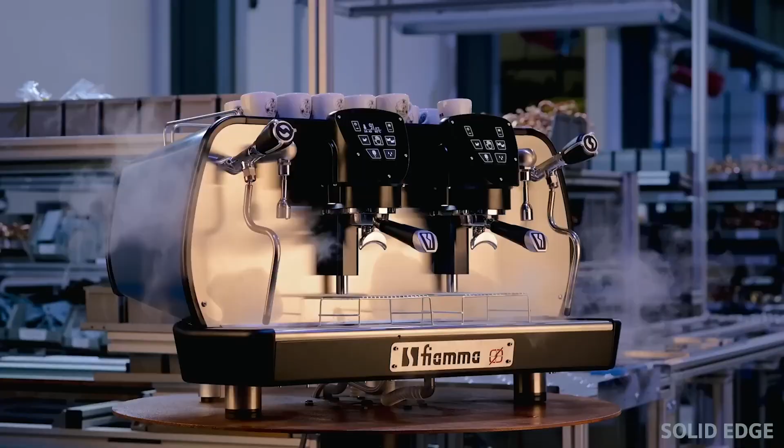Welcome to Solid Edge 2024. I'm Dan Staples, Vice President of Solid Edge R&D at Siemens. I'm joined today by Sudha Srikakalapu and John Sutcliffe. Sudha and John are both product managers for Solid Edge.

We're excited to discuss how you can unleash the power of intelligent product design, and that's at the core of digital transformation. So what is digital transformation? It's the integration of digital technologies into all aspects of your engineering business. But what that looks like can vary by the size of the company. So what does digital transformation specifically mean for small and mid-sized businesses?

We sponsored an exclusive study with industry analyst IDC. The focus was SMB manufacturing and digital transformation. We surveyed key decision makers at hundreds of SMBs around the world, asking them about digital transformation, their strategies, plans, and recent progress. The study was conducted at the end of 2021 and previously in 2017, so we can also look at the trends over the past few years. I want to share just a couple of highlights.

First, 72% of the advanced SMBs surveyed believe that digital transformation helps level the playing field for small businesses versus their larger competitors. Even higher than the last time this survey was taken, it was 63%. We asked about their investments during the global pandemic and related disruptions, and 80% of SMBs maintained or increased their digital transformation budgets. That's a great measure of how important these investments are.

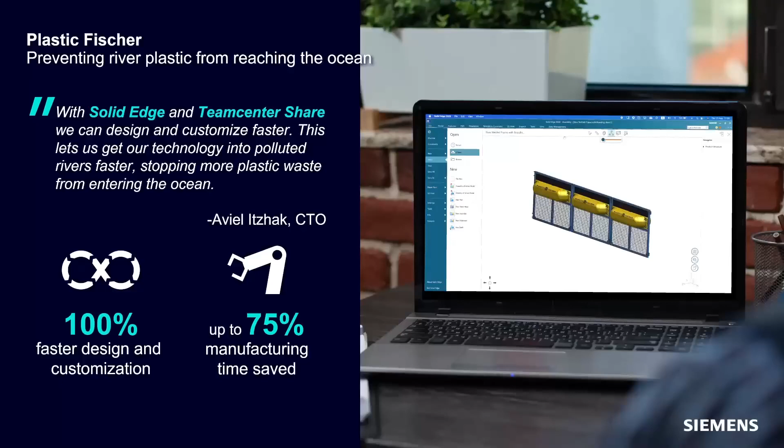Plastic Fischer is an amazing startup. They're helping the planet be a better place by keeping the oceans clean. Using Solid Edge and collaborating via Teamcenter Share, they improved design time by 100% and saved 75% in manufacturing time. Those are some big numbers and what digital transformation can bring. We love helping startups and really businesses of all sizes with digital transformation. Siemens is committed to that mission.

We are also investing in the next generation of engineers through a new program called Hour of Engineering. This innovative program demystifies engineering and promotes it as a desirable career path by providing real-world engineering challenges connected to global goals. It helps students build engineering habits of mind like creativity, systems thinking, and collaboration. We're truly excited to engage with the engineers of tomorrow through this amazing program.

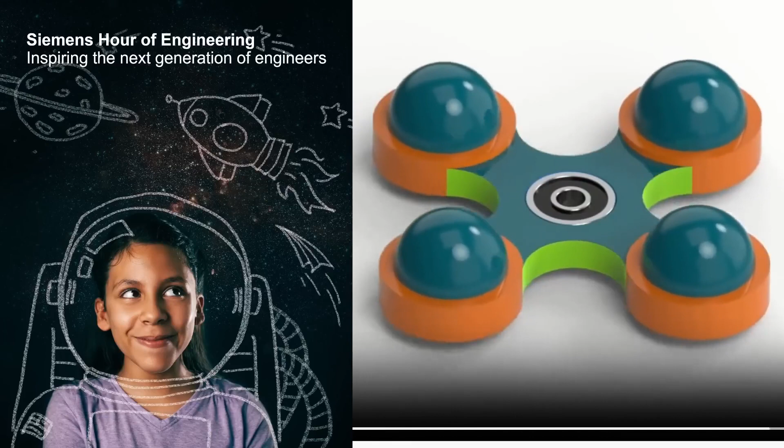From education to startups to even larger enterprises, Siemens Digital Industries is all about helping companies like yours transform into a digital enterprise. And that digital transformation is enabled by Siemens Accelerator. Siemens Accelerator is an integrated portfolio of software and services, and it really blurs the boundaries between traditional standalone domains like electronics, mechanical, and software. It really ties all those together into one seamless whole. And Siemens Accelerator really starts with Solid Edge.

Solid Edge is a key part of the Siemens Accelerator portfolio and is focused on the requirements of small and mid-sized manufacturers. Solid Edge enables manufacturers to create a comprehensive digital twin of their products and includes solutions for mechanical design, electrical design, simulation, manufacturing, and publications. It also includes solutions for data management for all the technical data that's created and consumed when supporting the comprehensive digital twin. It facilitates collaboration both within manufacturing companies and with external resources, including suppliers and customers. Solid Edge is truly your on-ramp to digital transformation.

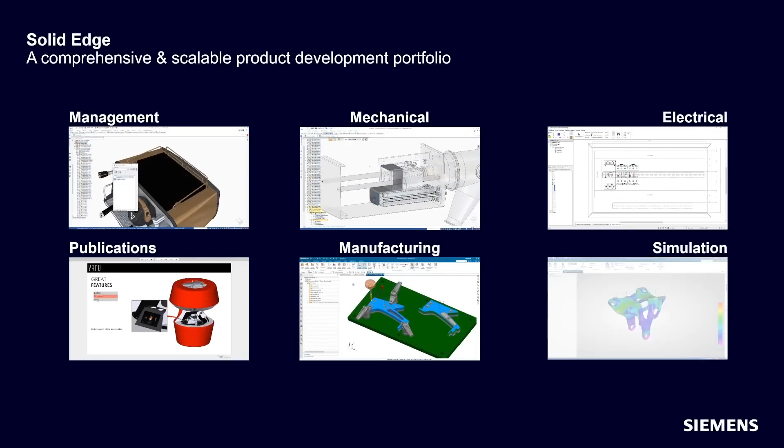And we can help you accelerate that digital transformation with Solid Edge 2024. Unleash the power of intelligent product design. With this year's release of Solid Edge 2024, we continue to push the boundaries of product development. Solid Edge 2024 empowers users to design more intelligently across every aspect of product development. With a continued focus on the user experience and large assembly performance, Solid Edge 2024 introduces functionalities and enhancements to automate and speed design as well as collaboration. Here are just a few.

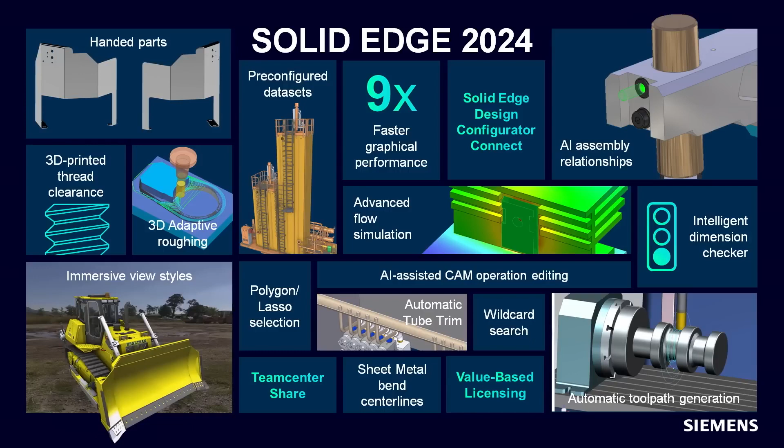9 times faster graphical performance, AI assembly relationships, great advancements in intelligent dimensioning, and so much more. Solid Edge 2024 is our best release yet. Beta customers have already had the opportunity to experience Solid Edge 2024, and here's what one of them had to say. Each year, Solid Edge gets better and better. Everything is faster. You can definitely feel the excitement from folks like Karsten at FOCA, who've had the chance to work with Solid Edge 2024.

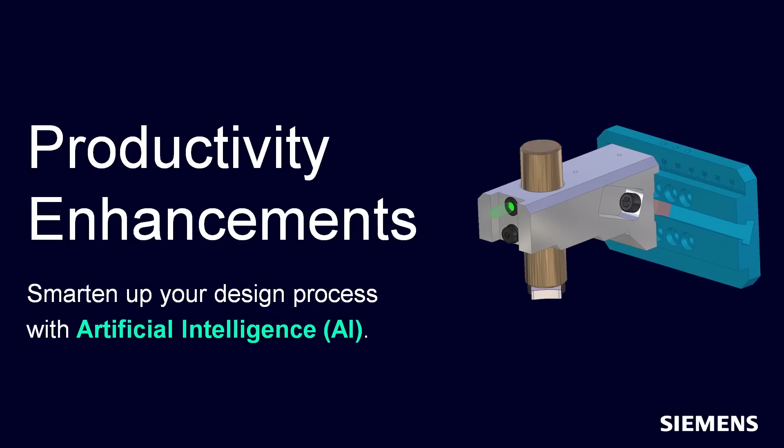Our featured customer in this year's release is Supfina from Germany. Supfina produces high-precision, fully automated grinding and honing machinery designed for super finishing automotive engine components such as crankshafts and camshafts. Let's start with a look at some overall productivity enhancements. These are the things that will definitely make your daily life easier. And we're leveraging AI technologies in the design process to push that even further. Let's take a look with John.

John? Thanks, Dan. Let's dive right into this impressive Supfina machine. We'll start by focusing on the polishing tool and fixture for these high-performance motorsport roller bearings. By expanding the assembly features in the Pathfinder, we can see that a hole and cutouts were already added at the assembly level, and they need to be completed with a round and a chamfer.

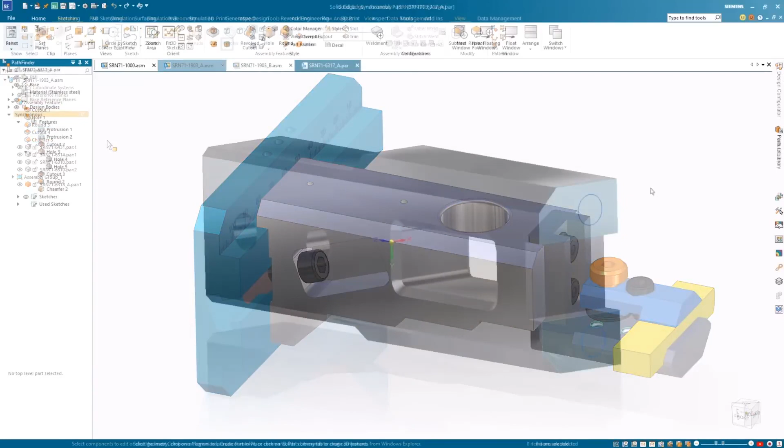New for Solid Edge 2024 is the ability to reorder the assembly features with a simple drag and drop process, just like we can in an ordered part model. It allows you to move parent and child features together, keeping your model organized. The polishing tool has a 3D printed component that requires 2 holes to be added.

To ensure appropriate fit and assembly for the 3D printed threads, we can define additional clearance values. These can be input as either a percentage or an absolute value. By selecting percentage, the internal diameter will increase by a percentage of the nominal diameter, which is seen in relation to the sketch. Switching to absolute allows the entry of a specific measurement.

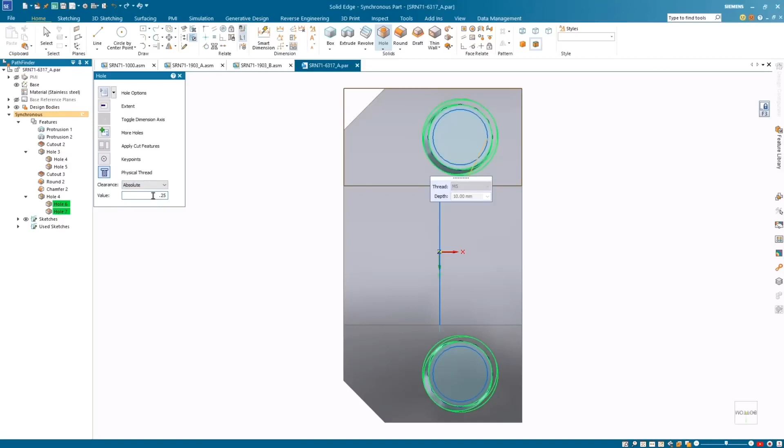To finish off the assembly, we'll add a polishing tool to the bottom of the cylinder. Here we'll add a mate and then a planar align. But then when trying to add the final axial align to correctly position it, we see it conflicts with some of the other relationships. Using the new Resolve Relationship Conflict capability, we can easily identify and suppress conflicting relations to resolve them swiftly. This new tool helps streamline part placement and assembly relationship creation.

Hovering over the listed conflicting relationships in the dialog highlights them graphically. One or more relationships can be suppressed until the requested relationship turns green, and the part is then placed correctly.

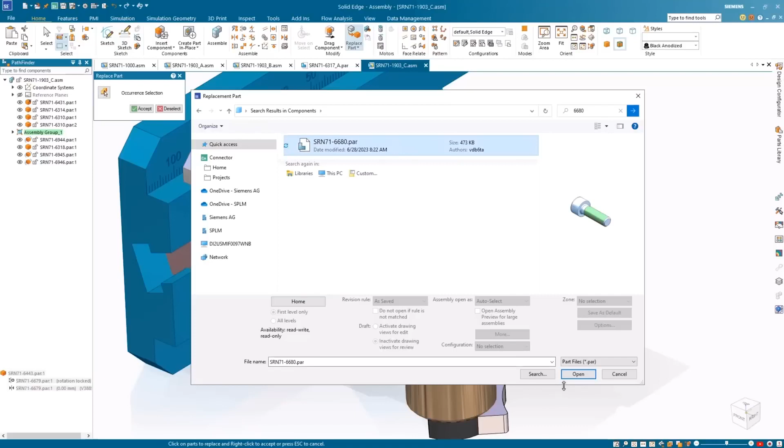The improved Replace Part command now leverages artificial intelligence to predict solutions for replacing a single component occurrence within an assembly. The AI predictions support both planar and axial align relationships and present the solutions in a secondary dialog, allowing us to preview and select the most suitable option before executing the replacement, saving time and effort by not having to manually create relationships.

Enhancements to variable table filters provide quick and easy access to filter options, resulting in an efficient experience that reduces both time and mouse clicks. In this example, variables are being used to control the position of the polishing tools and ensure they'll contact the bearing at the correct locations.

With numerous variables in the assembly, the results can be filtered by user-created, system-created, or both. Another great option for filtering is to only view variables relative to the components that are selected. This makes it easy in this case to find the swivel angle variable and make the desired change. And then change the NC axis value to change the vertical height of the polishing tool. Dan, back to you.

Super. Thanks, John. One of the things that you saw was physical thread clearance on 3D printed parts. And it turns out this is really important because unlike manufactured parts, where the standards define the clearance and high tolerances keep things working smoothly, in 3D printed parts you can get clashes that prevent smooth operation. Solid Edge automatically eliminates these, ensuring your printed parts work effectively.

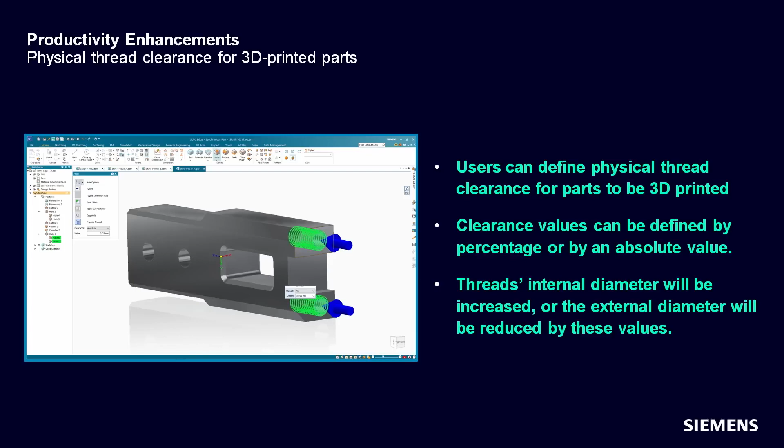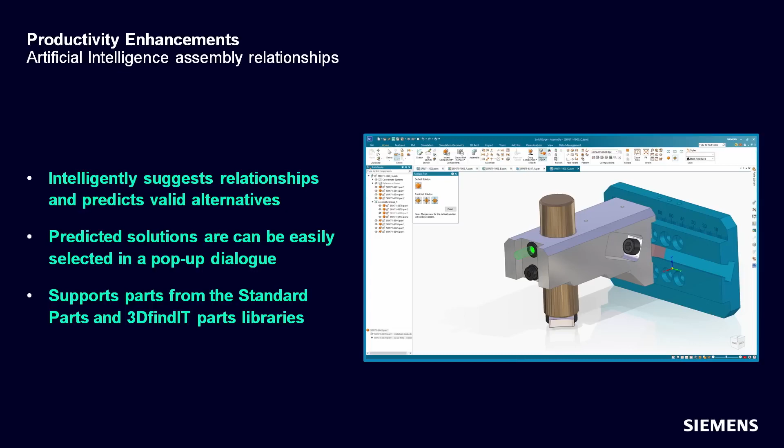You also saw the power of AI in action. With the improved Replace Part command, Solid Edge can now intelligently suggest assembly relationships and predict valid alternative solutions. The predicted solutions are graphically previewed in the design environment and can easily be selected in a pop-up dialog. And in addition to working with your custom designs, the AI-enhanced Replace Part functionality also works with parts from the standard parts catalog and 3DfindIT. Really powerful. Here's what Dave Iverson of Ariel had to say about Solid Edge 2024.

And I love the fact that he said, do more of the fun stuff. The reality is we are often doing tedious tasks. Let the computer do that. And that's what AI in Solid Edge 2024 can deliver.

Let's take a look at some more productivity enhancements in Solid Edge 2024. Over to you, John. Thanks, Dan. Let's look at even more productivity enhancements.

Locating the right part has never been easier. Search wildcards are now supported in parts libraries, model view palettes, and the assembly pathfinder. These wildcards provide flexibility when searching and make it far easier to find what you're looking for, even if you only know part of the name. Search results display sub-assemblies and parts in various shades of green for easy identification.

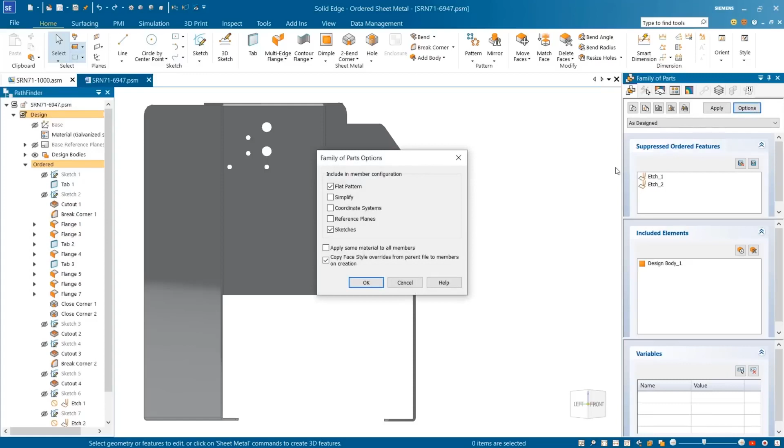With expanded family of parts options, we can now include flat patterns for sheet metal family of part members. This ensures each member contains all the information needed to create drawings and annotations. Once we define the new members, we can see further enhancements to family of parts, which include the ability to set individual material properties per member, as well as control over the suppression state of sketches and etch features. Not seen here, but we can also now handle simplified parts, coordinate systems, and reference planes too. Selecting a specific member shows the material change alongside the etch features defined for each specific member.

Greater control of selecting objects has been added with new polygon and lasso selection options. This makes many common workflows much easier, like in this case with resizing holes. Using the lasso selection option, we'll select the desired holes and change the size with ease. These selection options are available right through the product in the part, sheet metal, assembly and draft environments.

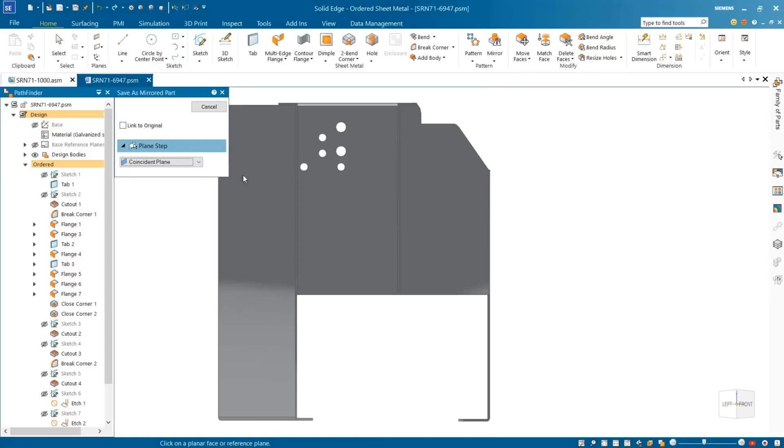Many designs require handed parts. These symmetrically opposite parts are identical mirrored copies of one another. New streamlined workflow makes it easier and faster to create these left or right-handed parts that can remain associative to the original part if needed. With the selection of the mirror plane and a quick save, our new handed part is immediately available for use. And the best part of using the Save as Mirrored command is that all the features used for creating the original sheet metal part are carried over, minimizing errors when making downstream design changes.

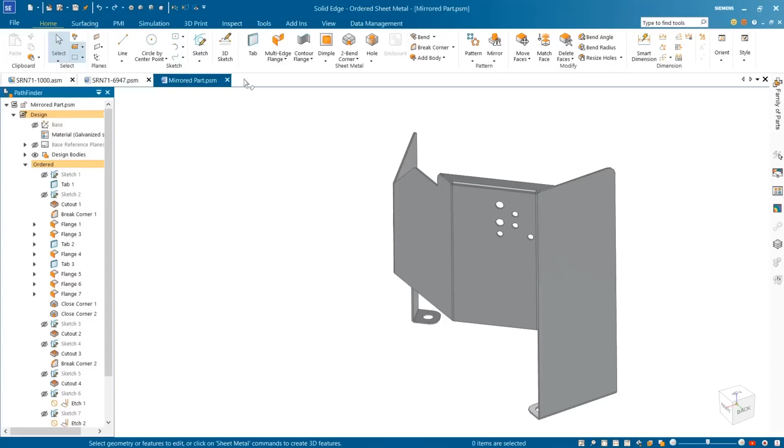The display of bend center lines is also now available in the flat pattern model environment. Here color coding defines the bend direction. Up bends are displayed in blue and down bends in green. The color and style of these can easily be modified to suit your company standards.

In Solid Edge Express Route, multiple pipes and tubes can now be automatically trimmed with the help of the new Trim Tubes command. In this example, after turning on the clipping planes, we can see there's overlap between the main tube and the 3 cleaning tubes. We can trim these tubes so they join together seamlessly with just a few simple clicks. Simply select the primary and secondary tubes, then Solid Edge takes care of the rest, cutting holes and trimming the ends as needed.

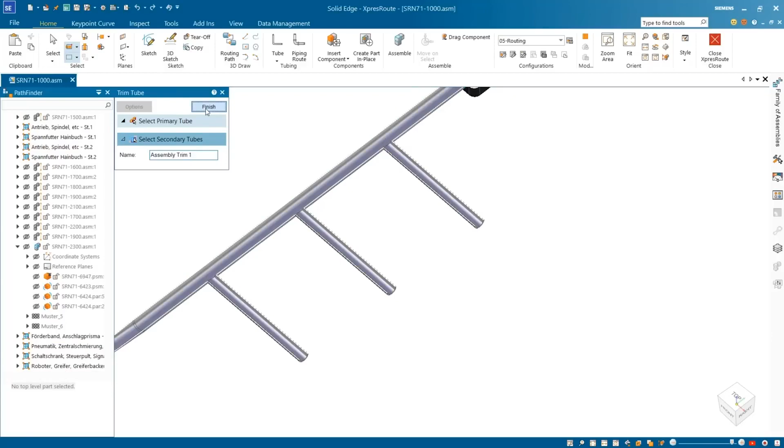Another new capability is the new Compact Recent Documents toolbar. It no longer takes up graphic space, and a single fluid click and drag quickly opens the file we need, saving time and energy.

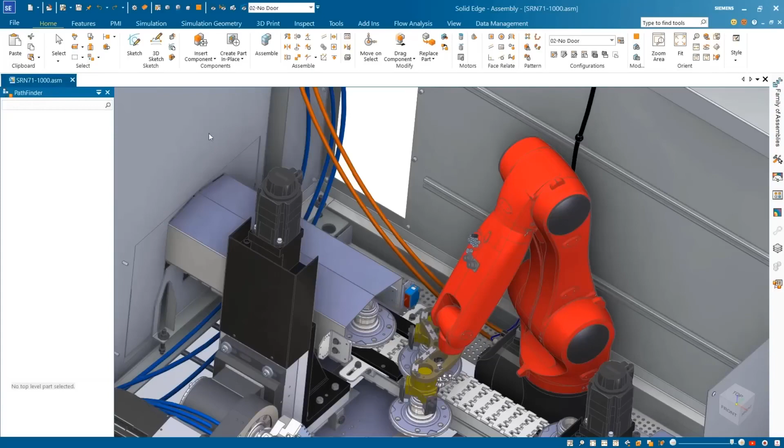The sheet metal cover requires some modification with the addition of several punched slots, which will locate it in the overall design. Construction bodies have been placed in the sheet metal part to represent the punches used to remove the material. Using the Subtract command, we can select the main target body and then quickly and easily choose the solid bodies as the tool set. Unwanted regions left behind as a result of this subtract operation, or disjoint regions, can be intelligently identified and automatically removed. Hiding the construction bodies, we can see all the internal disjoint regions within the sheet metal part have been removed, making the whole process quick and easy.

And back to you, Dan. Thanks, John. Now, obviously Solid Edge has had the ability to create left and right-handed parts for many years. But did you catch the breakthrough here? Optionally, instead of just producing a body, it will create a mirrored part with a fully editable feature tree. This frankly was quite a tough problem, and we had quite a few requests for it. So we're super happy to bring this to you in Solid Edge 2024.

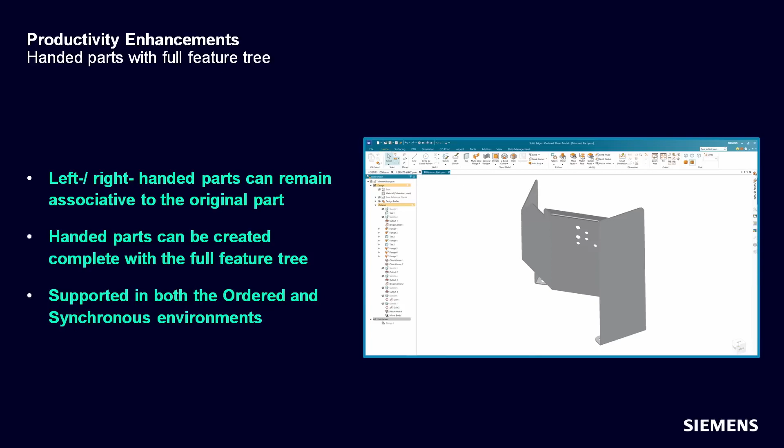You also saw a ton of other great enhancements, and just to highlight a few: Family of Parts not only creates correctly sized bodies based on the parameters, but it also supports material, etches, coordinate systems, sketches, and more. This was a long-standing request that we're very excited to deliver.

Lasso selection can be handy in so many circumstances, and now it's super easy.

An often requested enhancement, the new Trim Tubes command automatically trims and cuts holes in intersecting tubes in the assembly environment. It not only supports tubes that butt into each other, but end-connected tubes can also be automatically mitered.

The variable table has been really improved, allowing users to access filters more quickly and easily, saving time and reducing mouse clicks.

When placing parts, conflicting relationships can now be automatically identified, giving the user the ability to resolve conflicts easily with a pop-up dialog that displays the issues.

And so much more: matching coordinate systems, reordering assembly features, removing disjoint regions. The list just goes on and on.

Daniel Schulz of KAESER had this to say: Siemens really listens to its customers. And it's true, we do. We really work closely with our customers and listen to how we can make things better, and this has really helped make Solid Edge the great product it is today.

Next up is large assembly performance. Solid Edge truly has best-in-class large assemblies, and now it's even better. Better model view performance allows you to view and manipulate even the largest assemblies without lags, stutters, or buffering.

New immersive view styles put your models in a real-world environment that automatically updates with model movement for more realism. View manipulation is automatically optimized, allowing users to run the most demanding assemblies at lightning speeds, without loss of detail or the need to adjust settings to hide features, parts, or assemblies.

Dynamic viewing is up to 3x faster on single parts and up to 9x faster for very large assemblies.

Companies like Hatch are building some of the largest assemblies in the world. And as John notes, the Solid Edge 2024 advancements can have a huge impact on their designers, as much as 30% productivity impact.

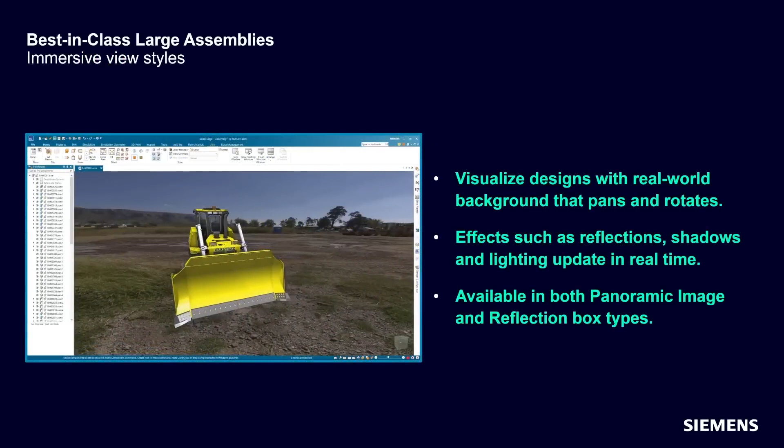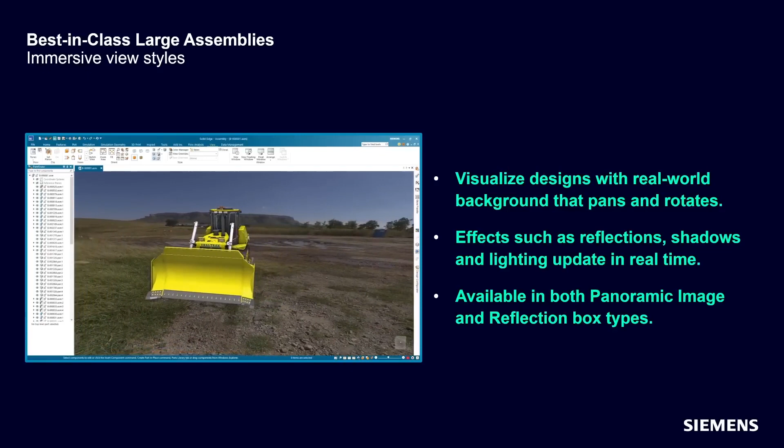In addition to the amazing speed improvements, you can also now visualize designs in a real-world background that pans and rotates with your model to create a more immersive user experience. As a design is manipulated, graphic effects like reflection, shadows, and lighting are also updated. This creates a more realistic, lifelike representation of the model in its environment. It's just like you're walking around the model in the real world.

Next up is Design Configurator, and I want you to pay special attention here because I know so many companies can benefit from this technology. Not only can you configure your own designs instantly, we are now delivering pre-configured conveyors, ladders, and other equipment that's commonly used in large machines and plants. What a time saver. Let's take a look.

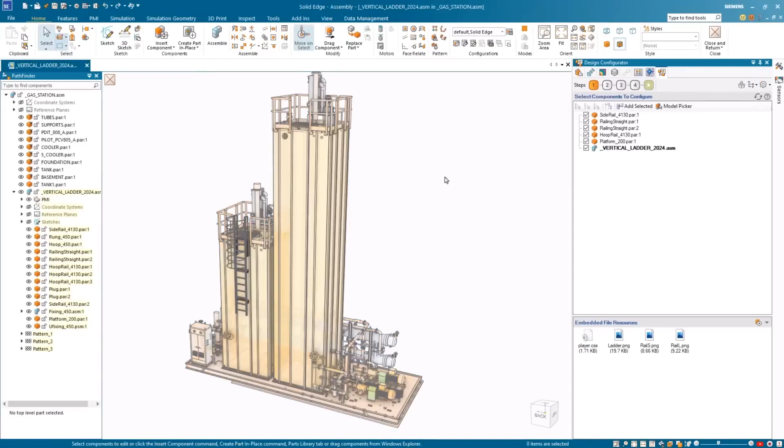Manufacturers are facing increasing pressure by their customers to offer greater choice and variety, leading to an increase in the number of product variants they need to define, author, and manage. New pre-configured models in Solid Edge Design Configurator allow quick and easy placement of intelligent datasets like ladders, conveyors, and enclosures. This helps to dramatically simplify workflows and improve productivity.

In this example, a fully configured ladder assembly is being modified directly within the main assembly environment. There is no need to go back to the sub-assemblies and configure them individually. A secondary ladder is needed to complete our design.

After placing the ladder, we can customize the length. Due to the intelligent model's rules, a second section and a safety hoop in the middle are also added.

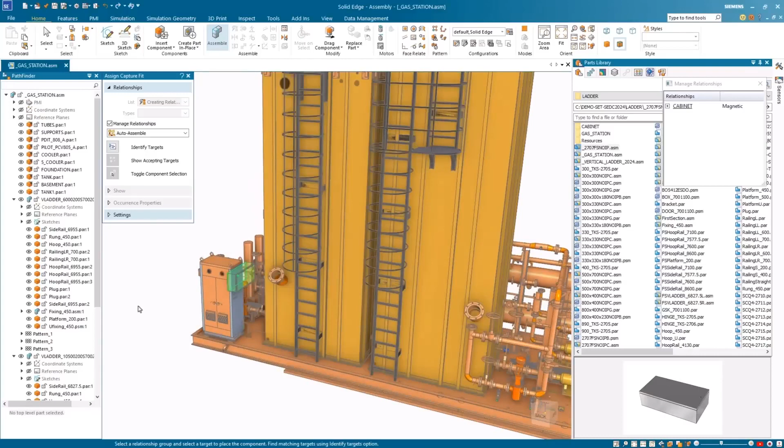To finish up the assembly, we need to add a final cabinet. The cabinet can be quickly customized inside the main assembly with the necessary dimensions and colors to fit our needs.

With access to fully configured datasets such as ladders and cabinets, it has never been easier for customers to get jump-started with our Solid Edge Design Configurator.

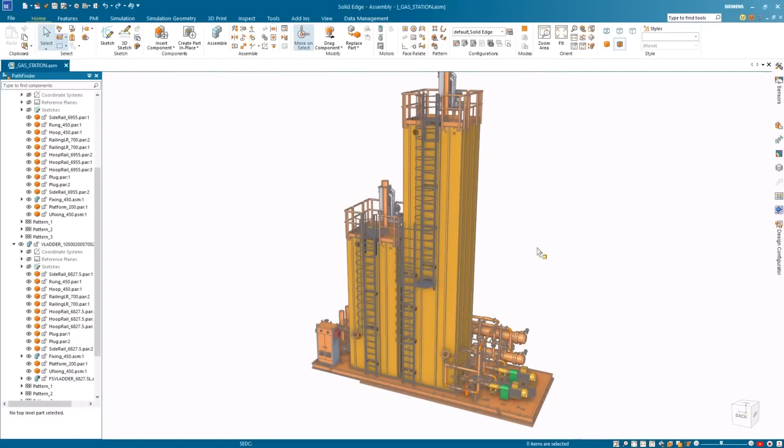With the new Call Subassembly command alongside the Place Part Model and Loop Action commands, full subassemblies can be placed and configured right on the spot. Using these new workflow model actions, brand new assembly lines can be rapidly built.

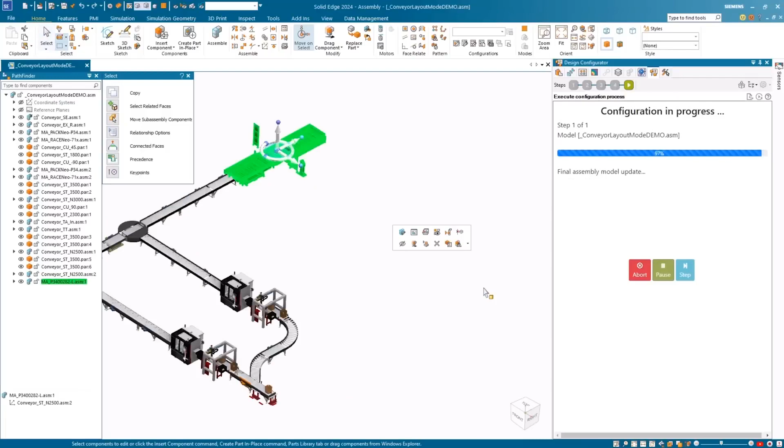The new ability to read from Excel files and external databases for input data and model actions allows you to automatically complete assembly lines in a fraction of the time. By reading the necessary conveyor placement data from an Excel file, the software instantly configures and completes the assembly line with just one click, as can be seen here.

Okay, back to you, Dan. Thanks, Sudha.

Isn't that amazing how quickly those ladders were put in place and fully configured in seconds? You can really boost design speed using pre-configured models of ladders, conveyors, and enclosures. One of the most requested customer features, pre-configured models downloaded from the Siemens Support Center, can now be directly used in the assembly at no cost to Solid Edge Design Configurator users.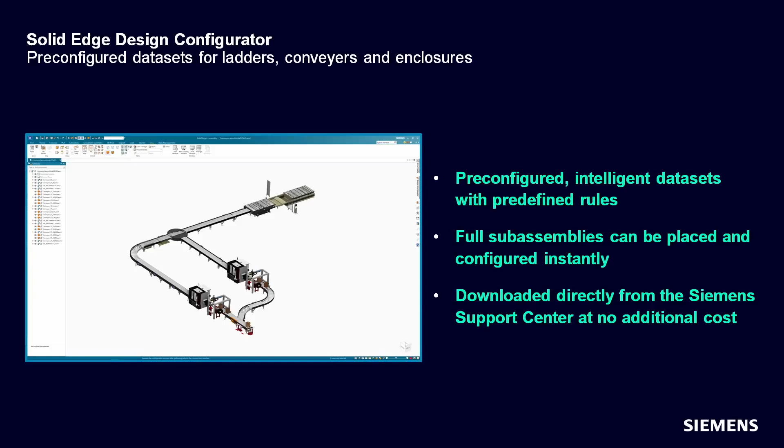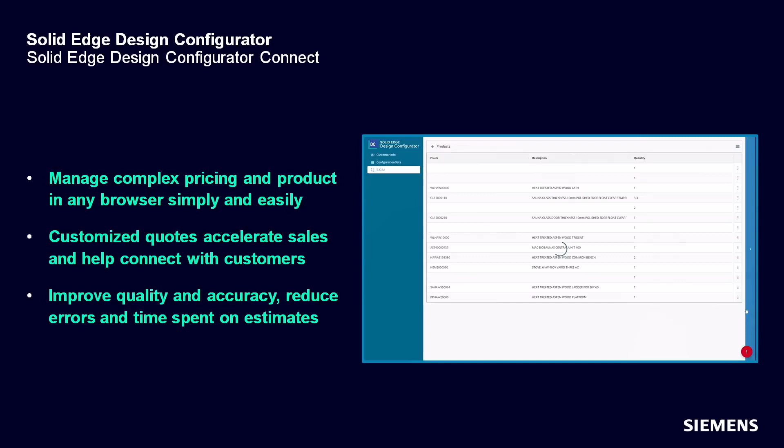In addition to all the great Solid Edge functionality you saw for configuring designs, you can also take advantage of Solid Edge Design Configurator Connect. This is a user-friendly web-based configurator that manages the most complex pricing and product configurations, allowing users to configure online in any browser simply and easily, and automatically generate sales documentation, including 3D models. Connect your engineering processes with sales and marketing, streamlining design workflows with the new Solid Edge Design Configurator Connect.

Michael Orr at Ariel quickly saw the value of Design Configurator and how it leverages your data and knowledge to really streamline assembly customization. He notes that it could be a real big time saver. If, like Michael, you thought that Design Configurator can save me time and money, I'm not surprised. It's an absolute productivity booster.

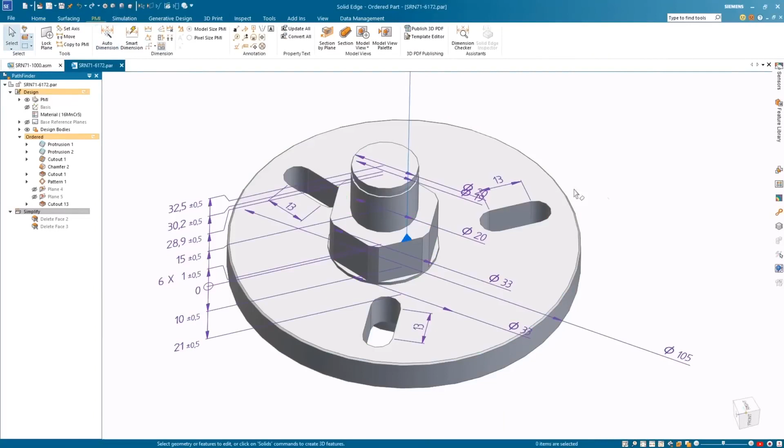The improved auto dimension tool in Solid Edge Advanced PMI can now be used with 1 or 2 datums for more freedom when automatically dimensioning turn parts. Using the new recent documents preview, we will open another bracket that's been partially dimensioned.

With the dimension checker command, we'll quickly and easily identify the constraint status of features and parts. The model is automatically color-coded with feature IDs, informing you of the constraint status of features and if they lack tolerance information. In this example, the slot and holes are under constraint and a dimension is missing a tolerance value.

By adding the necessary tolerance, Dimension Checker will instantly update with the new status, and the Auto Dimension tool will automatically add the missing location dimensions for the holes, improving creation speed. The improved Auto Dimension tool also includes stack dimensions and callouts for slot and oval cutouts. Features chosen in the selected primary, secondary and tertiary planes can be auto-dimensioned instantly.

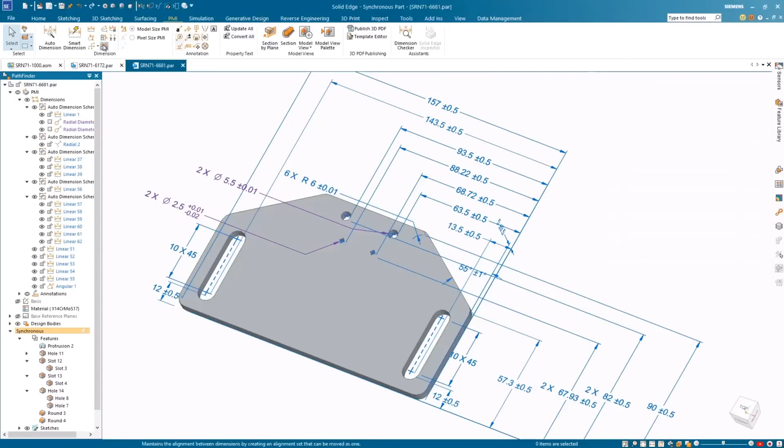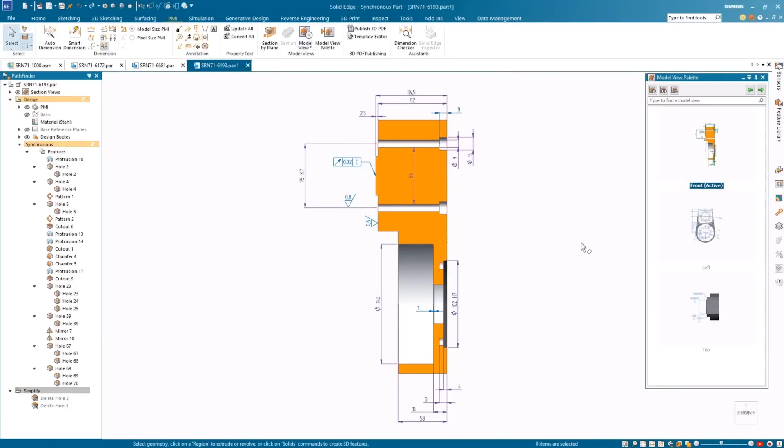The Common Model View command allows users to create common model views automatically with existing PMI. With the required views selected, Solid Edge automates view creation. Applying section views to a model view is easy with the enhanced vertical command bar that can be launched from the model view palette. This simplifies editing model views, as we can see here, whilst also adjusting the render mode.

To clean up the PMI dimensions, we will run the enhanced Arrange Dimensions command, which provides the ability to arrange coordinate dimensions alongside the linear dimensions. The Update Model Views automatically updates all model views when the model changes or PMI is added or removed. Auxiliary plane indicators can be added, giving us more freedom to annotate the models based on ISO or DIN standards.

We can also convey design intent for downstream manufacturing processes with 3D PDFs that can be published using templates. You can export PMI views with selected section views and render styles to 3D PDF to streamline the delivery of relevant design information. With new PMI face association, parent faces and section views are automatically highlighted when they are selected in the 3D PDF.

For assemblies, 3D PDFs can contain an interactive parts list. On selection, parts are highlighted in the list and graphics window. Associative properties such as author can also be included. STEP AP242 and JT files can also be generated and added as attachments within the 3D PDF.

Interoperability enhancements allow your Solid Edge files to look the same when opened across the Siemens Xcelerator portfolio, including NX. The improved PMI association and support for various PMI data provide increased connectivity for downstream applications.

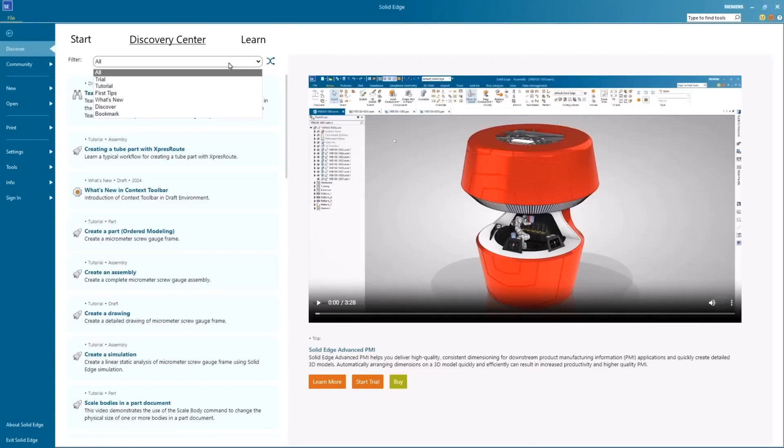Back to you, Dan. Wow, some really great stuff here, and I suggest that all companies look at this. We recognize that drawings aren't going away anytime soon, but it makes sense to move the intelligence upstream. Why have some of the information in the part and some in the drawing. Let's get to a single source of truth, the model. With 2024, there's some great enhancements here to get you on this path.

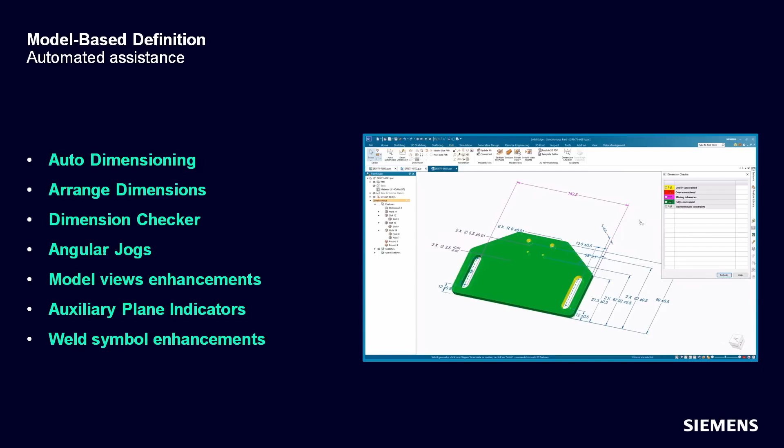Auto dimensioning has had a serious upgrade, and the dimension checker really lets you understand if your dimension scheme is complete. And there are many other enhancements, so now's the time to get started with model-based definition. But don't worry, you can move at your own pace, either doing drawings or creating smart PDFs. It's really up to you.

I'm always amazed at how some seemingly small improvements can make such a big difference. Ken at Pello was really taken with the new, better layout that the automatic dimensioning provides, a huge help to his team. As I mentioned before, don't worry, drawings aren't going away, and Solid Edge will continue to be the best in the business.

But if you're further along in the journey and looking to publish 3D PDFs, then we have you covered. For example, 3D section views are now supported during Publish, and you can now graphically highlight items in the PDF and see what's associated. This is really helpful in downstream interpretation. Companies like Kaiser are already on the paperless journey and are seeing definite benefits. Daniel sees some real savings coming as they transition to MBD and smart publishing techniques.

We've been talking a lot about core CAD functionality, and that is truly important. But more than ever, collaboration is key to improving engineering productivity. I don't think any of us could have anticipated how distributed our teams would become in recent years. But we definitely have some amazing tools to support this, and this comes in the form of Solid Edge SaaS, where collaboration is built right into your daily work. Let's take a look with John.

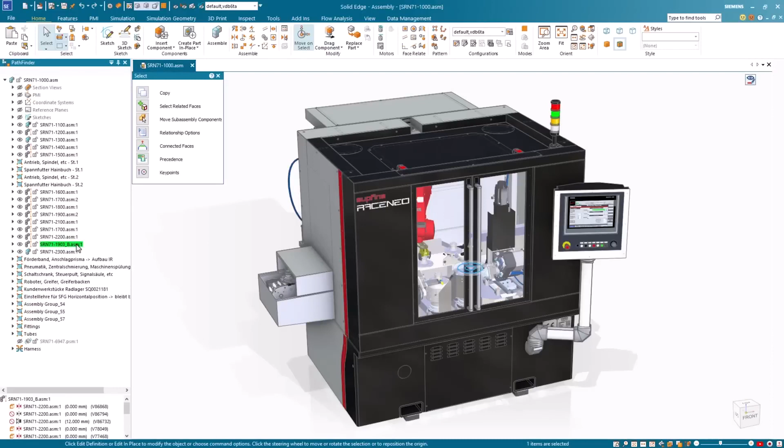Thanks, Dan. Fully embedded in Solid Edge 2024, Teamcenter Share streamlines collaboration with all your team, partners, and customers. Users can now access Share's comprehensive suite of collaboration capabilities completely within the Solid Edge environment. Opening our Supfina super finishing machine from Teamcenter Share in Solid Edge, we get to work quickly as we look at adding threaded holes to this part we plan to 3D print. Here you'll notice the options to add additional clearance to the threads that we discussed in an earlier demo.

Using the built-in data management capabilities, we can check in files to allow other users to make modifications, or check out an assembly to ensure exclusive access while we make changes. Again, with Teamcenter Share fully embedded in Solid Edge, we never have to leave the design environment as we create a project with just a few clicks. With Pack and Go and the Siemens connector, we can share the subassembly directly to Teamcenter Share.

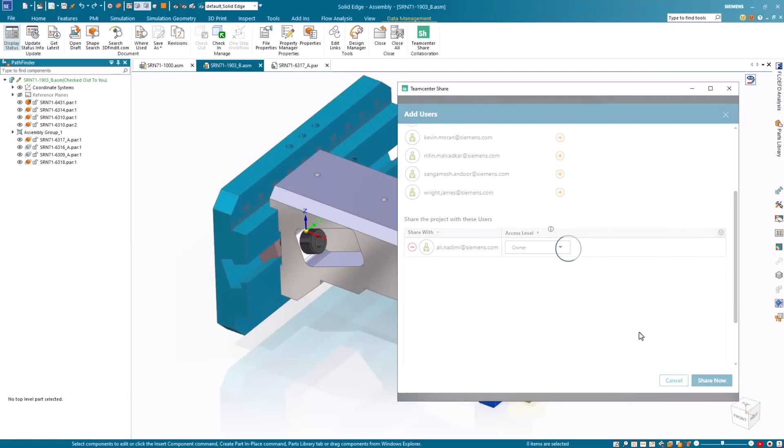Back in Teamcenter Share, within Solid Edge, we can open the project and add users to share it. Users can be granted various access levels depending on the type of collaboration needed. We'll grant this user owner rights, giving them complete access to review, edit, delete, or reassign the project. Other access levels include review, review and download, and full access.

Opening Viewer Markup gives us the ability to inspect the data quickly and collaborate with our team members. With the addition of threads, we want to make sure the spacing is still correct. A quick comment starts the conversation, and saving the markup makes it instantly available to our team.

Creating tasks has never been easier in Solid Edge thanks to Teamcenter Share. After naming the task, users have full control to add descriptions, set priority levels, due dates and statuses, and can assign the tasks to team members. Tasks can be viewed in a variety of ways, including on your Teamcenter Share dashboard, or as we see here, in a Kanban board. Dan, back to you.

Thanks, John. Great stuff. So you saw how you can access Teamcenter Share, a comprehensive suite of collaboration capabilities fully in the Solid Edge environment. The complete Share web user interface is embedded entirely within Solid Edge 2024, allowing for more streamlined collaboration workflows. The same browser-based experience of Teamcenter Share, still available anytime, any place, and on any device as before, but now Share is also available without leaving Solid Edge.

This saves users time by eliminating the need to switch between different application windows. Plus, you can synchronize your Solid Edge design data on your desktop and in the cloud. Automatically installed with Solid Edge, Siemens Connector offers enhanced integration between Solid Edge and Teamcenter Share, enabling you to work seamlessly with your cloud and desktop data.

In addition to the great enhancement of having Teamcenter Share embedded in the Solid Edge environment, we continue to improve Teamcenter Share as it supports products across the Siemens Accelerator portfolio. You can now onboard multiple users faster and easier, or share projects and assign tasks and send messages to users not currently associated with the project, attach notes to a project, files, tasks, and send messages instantly.

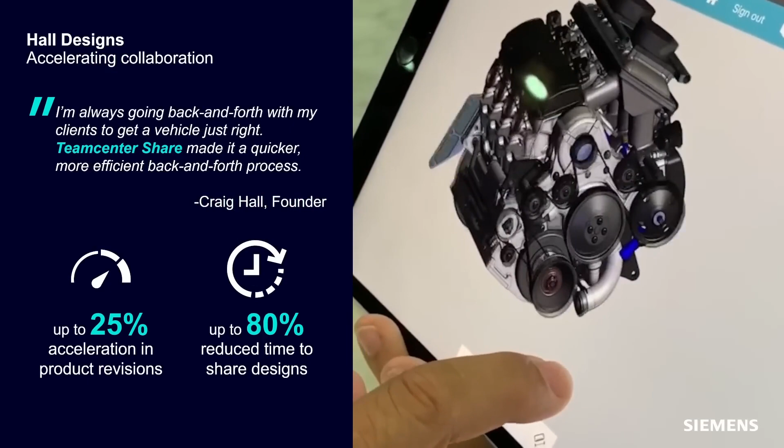In addition to Sunny Bay, many other customers are already doing great things with Solid Edge SaaS and built-in Teamcenter Share, like Craig Hall at Hall Designs. Hall Designs is using the new cloud collaboration capability of Solid Edge SaaS to collaborate more effectively and reduce their design and development time and dramatically streamline their communication with clients. Look at those numbers, 25% improvement in revisions and 80% time savings in sharing of designs. Now that's productivity.

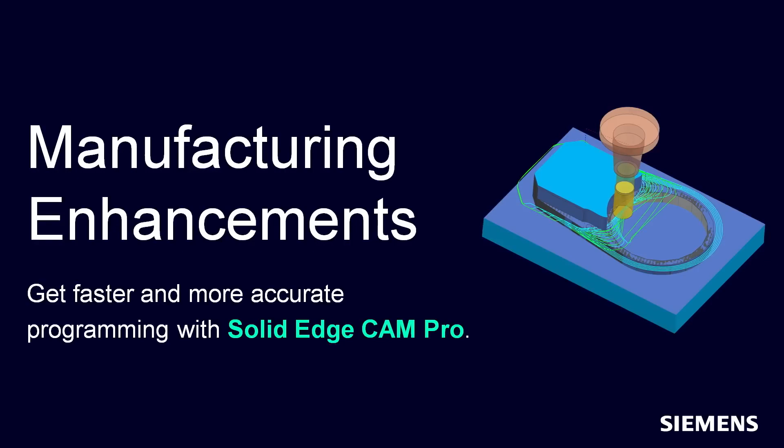Solid Edge CAM Pro has also received a great update. Get faster and more accurate programming with Solid Edge CAM Pro. Let's take a look with Sudha. Thank you, Dan. Solid Edge CAM Pro continues to improve productivity by leveraging artificial intelligence to suggest the most frequently used machining options in a new prediction tab. No more hunting for options. The prediction tab is customized for each user.

Also new is auto-generate for 2-axis and 2.5-axis operations. For simple turning operations or for certain 2.5-axis milling, we no longer need to generate the operation. As soon as enough parameters are available to calculate a toolpath, Solid Edge CAM Pro takes care of it. This makes NC programming faster by allowing users to review results quicker. Similarly, any changes that require recomputation are also automatically performed.

There is also now support for prime turning. Using either Sandvik CoroTurn Prime A or B turning inserts, we can quickly, efficiently and safely remove the material from this undercut. Notice how smooth the entrance and exits are, which produces less stress during the cutting and helps the inserts last longer.

Solid Edge CAM Pro introduces 3D adaptive roughing, which provides the most efficient rough machining possible. 3D adaptive roughing has reliable dynamic holder collision checking when the tool moves within a region or across multiple regions. Tool path generation is faster and bottom-up cutting has been enhanced. We also added a new option to top off flat faces for faster throughput.

Moving forward with our success with PostHub, we are now introducing the Cloud Connect tool library. As the name implies, cutting tools are now stored in a cloud database for easy access. Tools and holding devices can be easily searched, downloaded and modified. Turn milling is a new operation subtype designed to easily machine symmetric and eccentric cylindrical surfaces with high surface quality, precision and high cutting volume. It is used to pre-cut cylindrical parts before finished machining with other rotary milling operation subtypes.

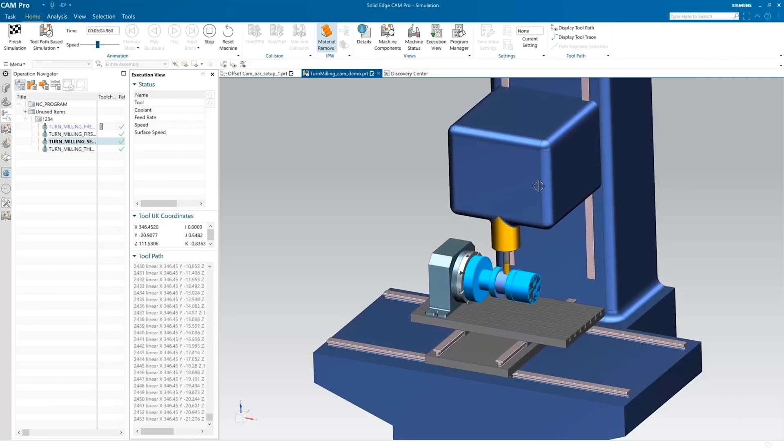Solid Edge CAM Pro provides cutting-edge updates that accelerate machining while bringing the power of artificial intelligence and the cloud to speed your manufacturing processes. Back to you, Dan. Thanks. Some real time savers in there. The 3D adaptive roughing means faster programming and more efficient machining, while the AI-assisted operation editing predicts the most probable parameters, accelerating programming processes and ensuring accurate repeatability.

The new prediction mode will learn from the user's best programming practices to dynamically change and predict user behavior. Cloud Connect tool library is a new application that utilizes the cloud and provides a user-friendly, intuitive experience when previewing tools and dimensions. And prime turning is now supported. Prime turning is a new methodology which enables turning in all directions, resulting in a 50% productivity increase for turning operations.

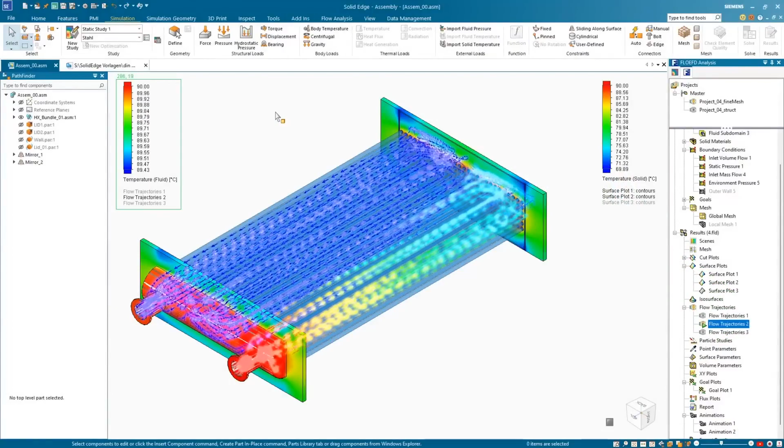Enhancements in Solid Edge Simulation and Simcenter FloEFD for Solid Edge increase simulation performance and speed with improvements to meshing, structural analysis, and interoperability. Here's Sudha. Okay, thank you, Dan. New for Solid Edge 2024 is the ability to import solid temperature results from Simcenter FloEFD for Solid Edge into a static simulation study.

Here, we see the results of a FloEFD simulation in a heat exchanger and the temperature distribution of the fluid flow on the parts. Switching to Solid Edge simulation, we already have a study created with all constraints but without any loads. Using the new import solid temperature function, we can set the load for our simulation study and start the solve. The Solid Edge simulation study processes the results from FloEFD and solves the calculation.

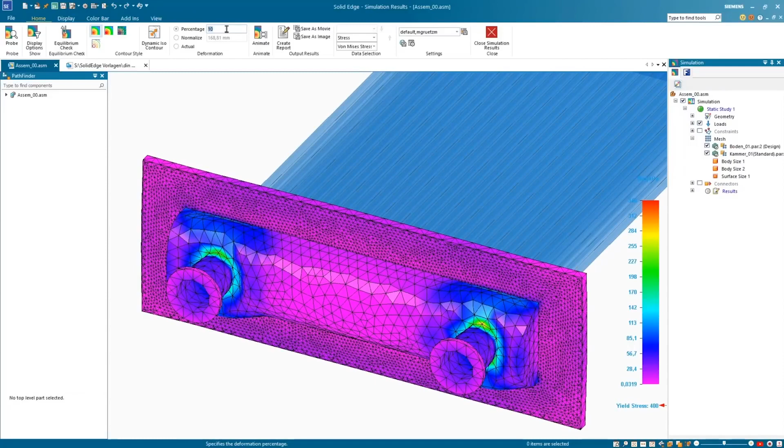Viewing the results, we can see there are high stresses in the parts as a result of the temperature load. This interoperability is useful for finding the thermal stresses and deformation in solids, helping understand part behavior and avoiding failures long before real products are manufactured.

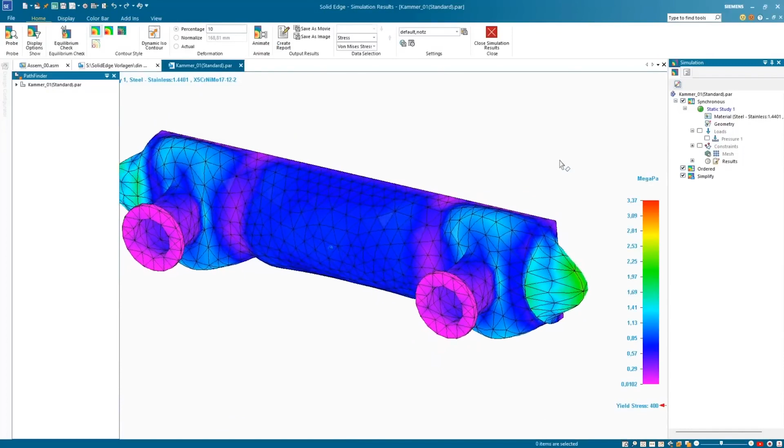Solid Edge 2024 also introduces the ability to apply a force to any user-defined point, allowing for greater control of simulation studies. In this example, we have already created a study to show what happens when the component is put under an internal pressure. With some further analysis, we can define some additional loads. An easy way to do this is simply to add a force to a point.

We have already defined a sketch, but we will add an additional sketch point that we wish to use in our study. Then select this point to apply the force to. We will set the force direction, solve the study, and then review the results.

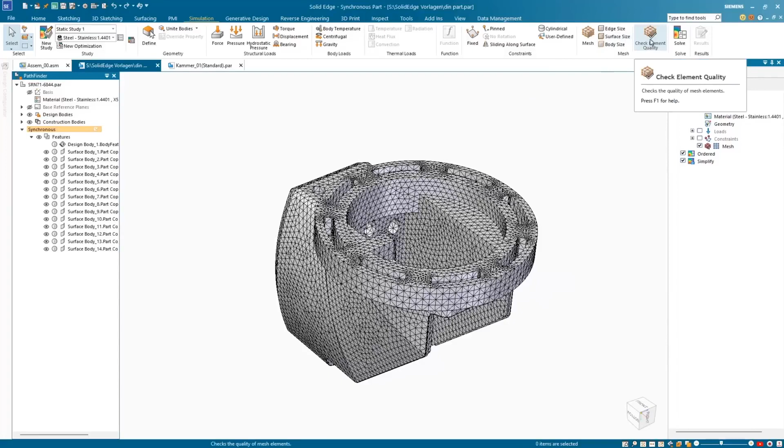Finally, we want to look at another function that is very useful for checking more complex models. Our model already has a mesh generated and we wish to analyze the quality of it with the check element quality function. It hasn't always been easy to identify the problematic areas, but now the display of mesh quality checks has been improved to make it easier to identify poor quality areas. This means users can now immediately take the necessary actions to address any problem.

Back to you, Dan. Thanks, Sudha. Looks great. As you saw, Solid Edge simulation users can now import solid temperature results from a Simcenter FloEFD analysis into a Solid Edge study. The new option to apply force to any user-defined point, rather than just a mesh vertex, allows for greater control of simulation studies. And the display of mesh quality checks has been improved to make it easier to identify poor quality areas.

Finally, the insulated gate bipolar transistor, or IGBT compact model, is now composed of an electrical element and two resistor component compact models, providing a very efficient representation of the IGBT element.

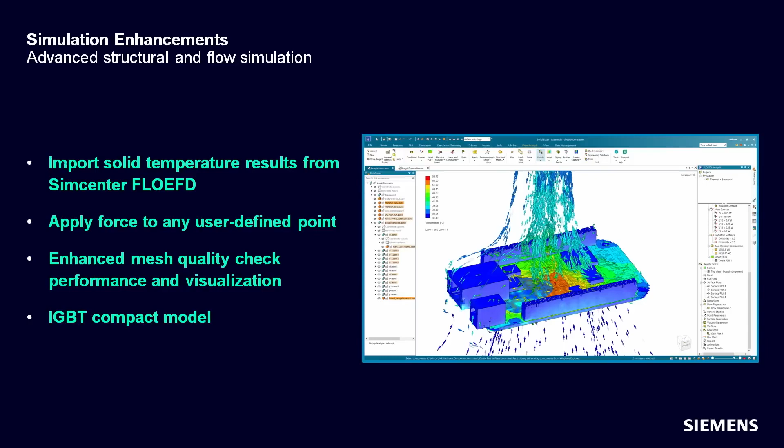Next, I want to talk about value-based licensing, which is a truly important innovation, allowing you to explore and use a variety of Solid Edge portfolio products at a very low cost. Rather than traditional purchasing of individual products, value-based licensing provides cost-effective bundles of license tokens that can be used to access Solid Edge add-on products on demand. You get instant access to advanced functionality that can be shared across your product development teams on an as-needed basis, and at a much lower cost than buying individual products. Let's take a look at how it works.

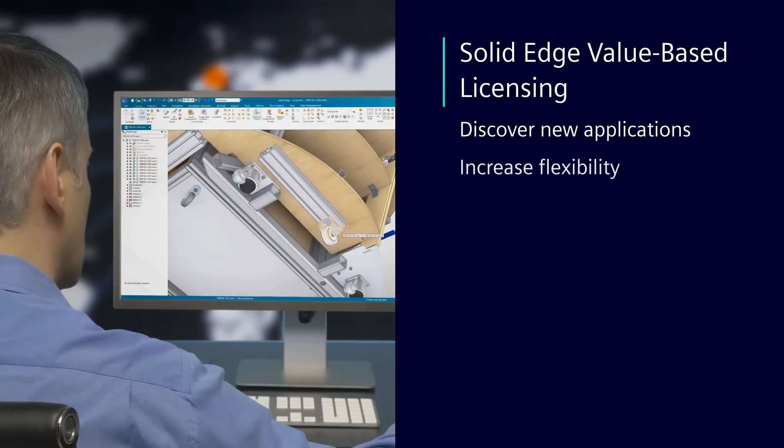New for Solid Edge, value-based licensing. A flexible licensing option to help you with the challenges of a rapidly changing development environment. This approach allows you to discover new Solid Edge add-on products while increasing flexibility for you and your team. Let's have a look at how value-based licensing works, starting with the base application, Solid Edge Classic or Premium. Value-based licenses offer a fully flexible environment in which users can explore different functionalities.

Companies acquire a set of tokens, which allow the running of a wide array of applications. Tokens are available in yearly subscription packs that make the add-on products available as a single shareable bundle. Tokens can be checked in and out to allow for maximum flexibility. Each add-on product consumes a defined number of tokens when in use. The total number of applications and which specific applications that can be checked out is limited by the number of tokens users have available.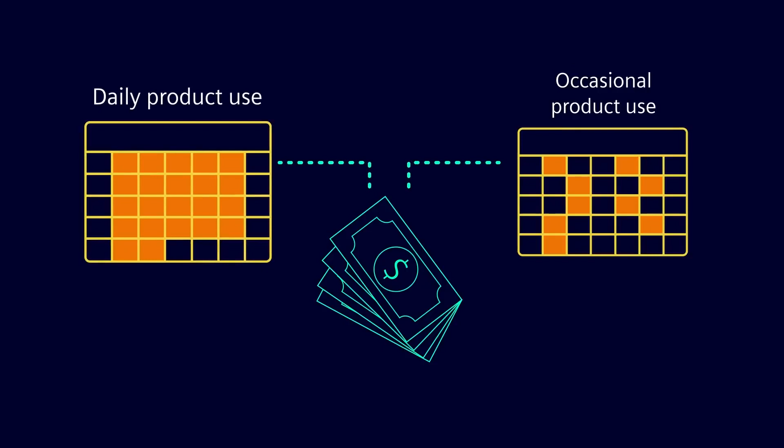Value-based licensing gives you the ability to manage costs, discover new applications, and easily scale your business. In many cases, the total investment is less than individual licenses, yet the flexibility dramatically increases regardless of whether the modules are used daily or occasionally. Value-based licensing, new for Solid Edge, offers a truly flexible, cost-effective, simple-to-scale approach that reduces risk over time and encourages users to maximally explore new possibilities.

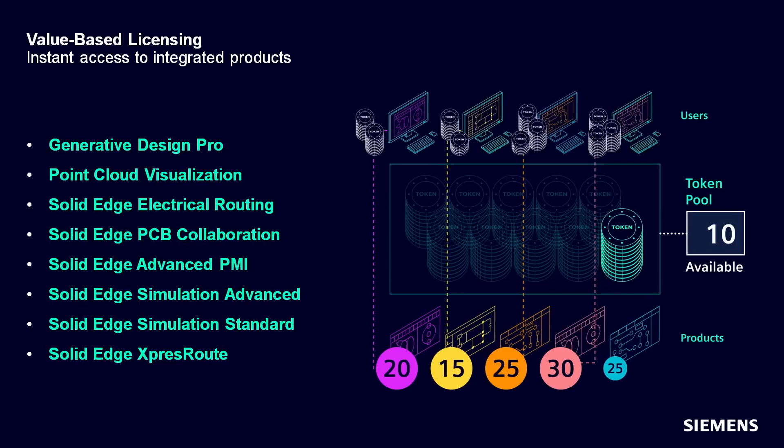I think you're really going to like value-based licensing. Look at the list of products here. These are all valuable products, but are you going to use each one every day? What if you could just mix and match and decide what you want to use at any time without having to buy all the individual products? Well, now you can. Generative Design Pro, Point Cloud Visualization, Solid Edge Simulation Advanced, and all the others you see here are all available through value-based licensing. I think you can see how this can add a whole new dimension of flexibility and access to your product usage.

Tokens are available in yearly subscription packs of 25 and 50 that make the add-on products available as a single shareable bundle. Tokens can be checked in and out to allow for maximum flexibility. Users can mix and match the add-on products as needed within their permitted token allowance. It's really the ultimate in flexibility and will give you access to technologies you never thought possible at an unbeatable price point.

In addition to all the wonderful enhancements you've seen in Solid Edge itself, the Siemens Accelerator portfolio is the most powerful in industry. And with Solid Edge, you can connect to the many other powerful applications that are part of Siemens Accelerator, like NX and Teamcenter. Let's take a look at how Solid Edge and Teamcenter work together closely in a product configuration scenario. John? Thanks, Dan.

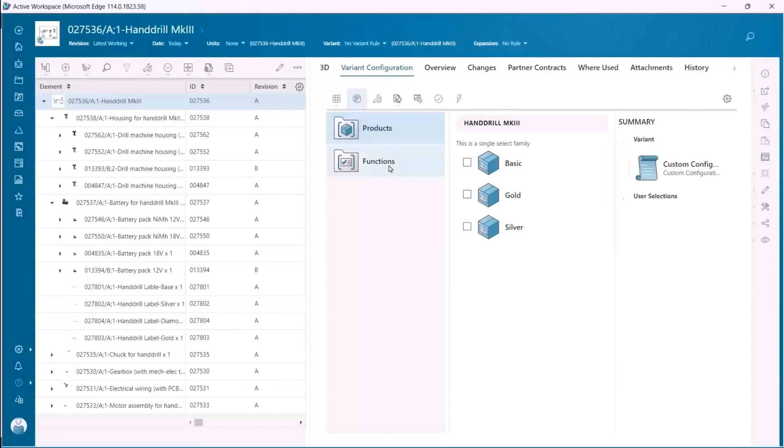Engineering complexity explodes as products become more complex. Product cycle times become shorter, markets and manufacturing go global, and customers demand more choices and customization. Companies need a solution that enables them to manage this complexity, from product inception through to manufacturing, in a simple way that enables reuse and commonality, and eliminates engineering cycles on products that will never be offered on the market. Teamcenter and Solid Edge are industry-leading solutions that address these challenges with tight integration.

This handdrill assembly has been configured with product family members using Teamcenter Product Configurator. We're seeing the full 150% bill of material, and if needed, we can apply a variant which updates the bill of material accordingly. In this case, the handdrill has been configured with 3 variants. Once opened in Solid Edge, we get the options to load a 150% unconfigured bill of material, or we can select a product variant which loads a 100% bill of material.

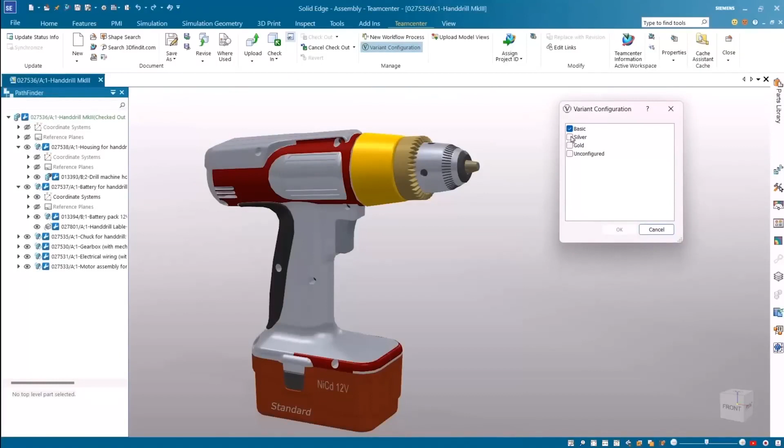We'll select the standard basic variant from the product family and load it in Solid Edge. All the components associated with this variant are loaded. We can verify this by expanding the subassemblies to visualize the components associated to this standard variant. The list of product variants defined in Teamcenter can be viewed, and the active variant currently loaded in session is highlighted. All information is synchronized between Teamcenter and Solid Edge.

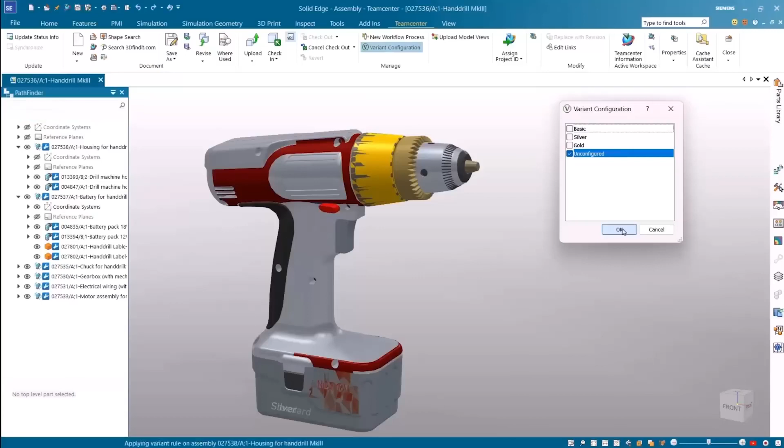We have full control whether we want to load a different variant, load more than one variant to provide us a 120% bill of material, or load all variants to create the 150% bill of material. If needed, we can edit any variant as we have full read-write access. We'll load the gold variant, then edit the battery subassembly to make some changes. Here we'll reposition the label component in the correct location using the appropriate assembly constraints. Dan, back to you. Thanks, John.

It's great to see that tight integration. Teamcenter Product Configurator, which enables users to create variant configurations of assemblies, is now fully embedded in the Solid Edge environment. This allows you to take full advantage of the digital twin by using common variability thread for highly complex products. Powerful impact analysis technology is also available across the product suite.

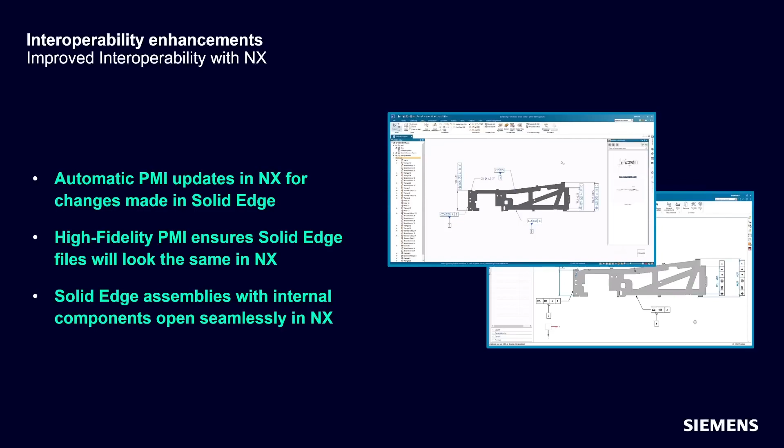We've also significantly upgraded our interoperability with NX. Changes to PMI in Solid Edge will now automatically update in NX, and the PMI from the Solid Edge files look the same when it's opened in NX. Support for stacked annotations, center marks, centerline, bolt hole circles, and more is now available. Additionally, assemblies created in Solid Edge that contain internal components now open correctly in NX.

We've also expanded interoperability and collaboration between other parts of the Siemens Accelerator portfolio. For example, technical publications and Solid Edge Inspector are both integrated into Teamcenter Share, and Solid Edge Inspector now fully integrates with OpCenter and Teamcenter Quality. At Group SEB, longtime Solid Edge user Olivier believes that these interoperability functionalities and others across the Siemens Accelerator portfolio give him and his team the right solution to meet their current and future design challenges. Not only does Solid Edge work great with other parts of the Siemens Accelerator portfolio, it also works great with data from external sources.

So whether you're switching from another CAD system or reusing legacy design data or working with suppliers, Solid Edge makes working with third-party files as easy as native data. If you're working with customers or suppliers that use a different CAD system, CAD Direct is going to save you a lot of time. Rather than translating the file and having an intermediate file to keep track of and update, with CAD Direct you're using the design file directly. So you can, for example, directly assemble a SolidWorks file into a Solid Edge assembly.

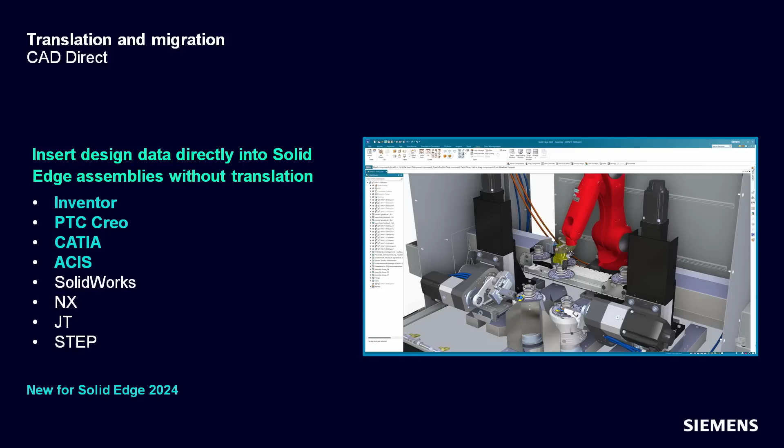And because this is so powerful, we've expanded the lineup of systems that CAD Direct supports, now including Inventor, Creo, CATIA, and ACIS. If you haven't incorporated CAD Direct into your workflow, now is the time. And for those of you migrating from other systems to Solid Edge, we've continued to make our best-in-class tools even better. Those of you coming from SolidWorks and Inventor will see even more complete and easier to use tools than in the past. We've also enhanced many of our other data sharing pathways, such as STL, Creo, and even 2D.

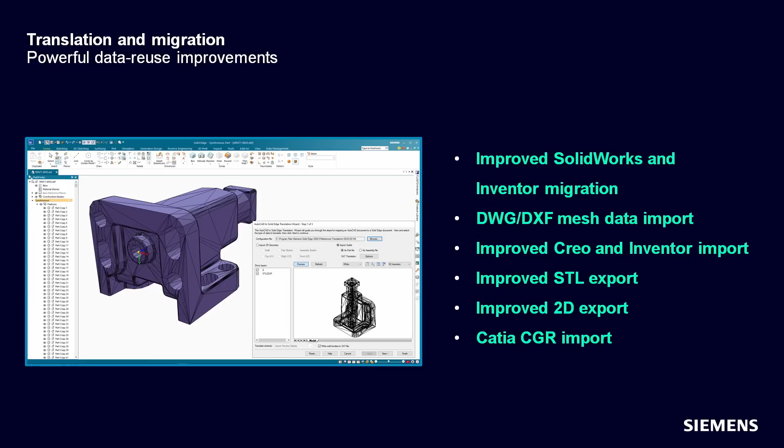Solid Edge 2024 is our best release yet. We're excited to bring you all the new functionalities and enhancements because we know they'll help streamline your productivity. But don't just take my word for it. Throughout this presentation, we featured Supfina's Race Neo Super Finishing Machine. Let's see what Marcus Mueller at Supfina thinks about Solid Edge 2024.

We at Supfina are specialists for super finishing and any high-precision surface. We design solutions for our worldwide customers, especially for the automotive and bearing industry. With our experience and the help of Solid Edge, we can meet our customer-demanded requirements. We are using Solid Edge now for 23 years, and it's a critical component of our success. In my opinion, the standout features of the new release are large assembly performance, cloud collaboration via Teamcenter Share, and the usage of AI-powered design tools.

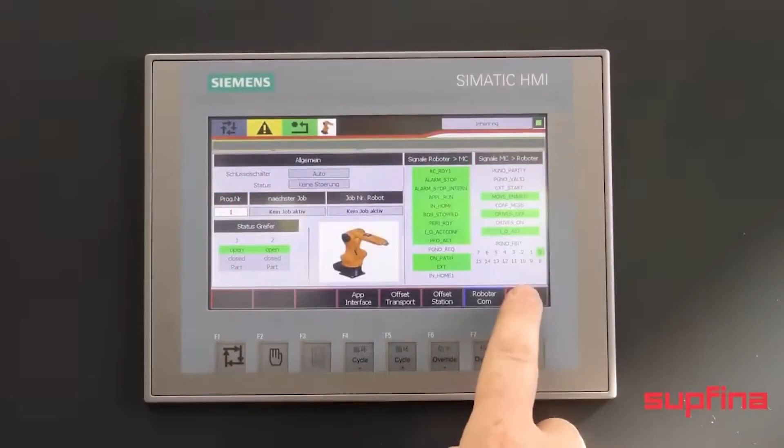Supfina assemblies are large and complex because we use them as a digital mockup. With the new release, we are able to visualize, pan, zoom, and rotate our large assemblies 5 to 9 times faster. Also, we plan to use Teamcenter Share to communicate more easily with our suppliers and external design offices. This certainly works with the great redlining and Kanban task management. AI enhancements, especially in the area of synchronous technology, make Solid Edge easier to use. For us, that means save time for ideas and reduce unproductive work.